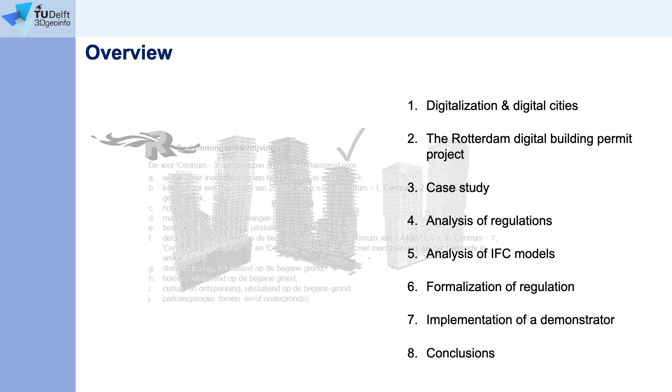The background of this work is the digitalization process, which is ongoing all over the world, with the aims of improving efficiency, improving the quality of services and cities, reusing the data effectively, enabling advanced analysis, and saving time and money. In particular, for building permit, several initiatives and pilots are developed in the world.

Some of the closer ones are the EuroSDR GeoBIM project involving several European countries, the European Network for Digital Building Permit, born specifically for this aim, and the European Directive on Public Procurement, ruling the adoption of digital technology for building permit. In the city of Rotterdam, a digital city pilot is running as well, within which this project was funded.

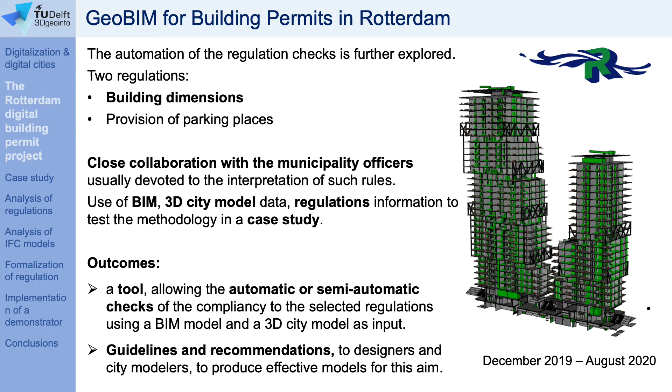The aim of the project was the development of a methodology and a tool able to support the municipality in the check of some regulations, namely building dimensions, which is the object of this presentation, and the provision of parking places. The biggest challenge of the project was the use of data as produced by practice and the actual municipality regulations, for which a close collaboration with the municipality officers was planned.

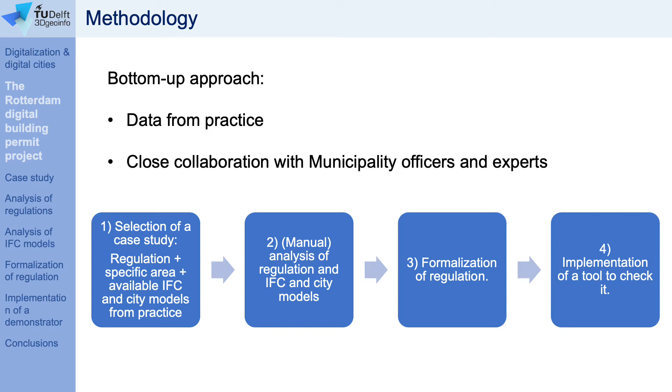The use methodology adopted a bottom up approach. After the selection of a case study, including regulation, area, and data, we analyzed all the involved components, formalized the regulation, and implemented a tool consequently.

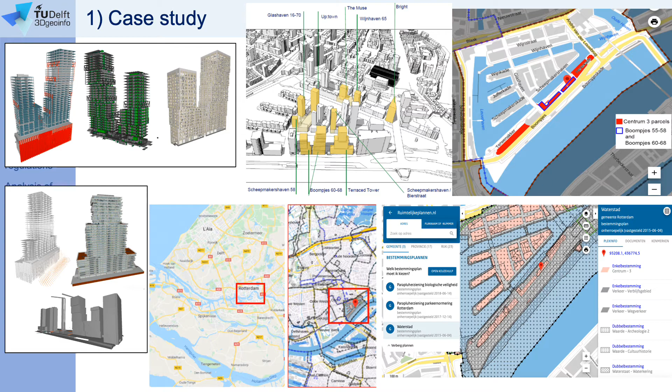The case study was in the Maritime District in the center of Rotterdam. The dimension regulation was considered for two buildings planned in the area. The IFC models produced by the architects of these two buildings were available for the project.

When reading the regulation in order to formalize it, many ambiguities and uncertainties can be detected, and several doubts had to be solved by the municipality experts in order to just understand how to interpret it correctly, even without the additional challenge of making them machine readable.

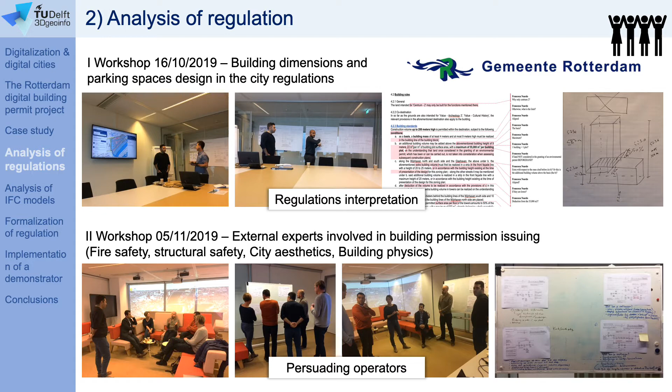To help in this process, two workshops were organized by the municipality in order to have the opportunity of easily interacting with the involved experts and having all our questions solved and answered.

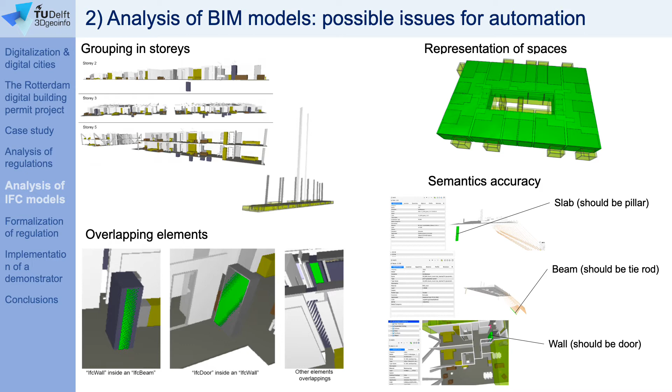Besides analyzing the regulation, we inspected the provided IFC models and we could notice some issues that could prevent some automatic processing. It is important to consider them when designing the tool and maybe trying to fix these at least in future through the guidelines to modelers that we will provide.

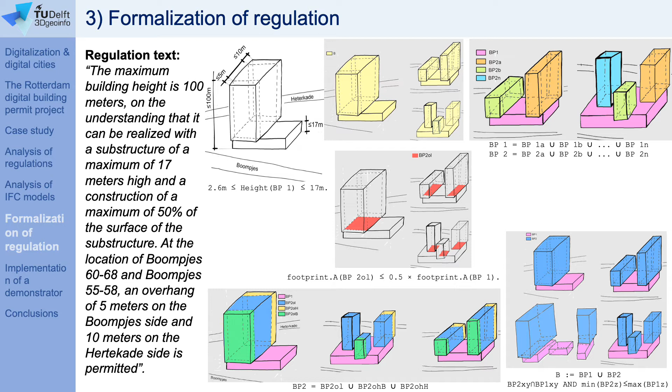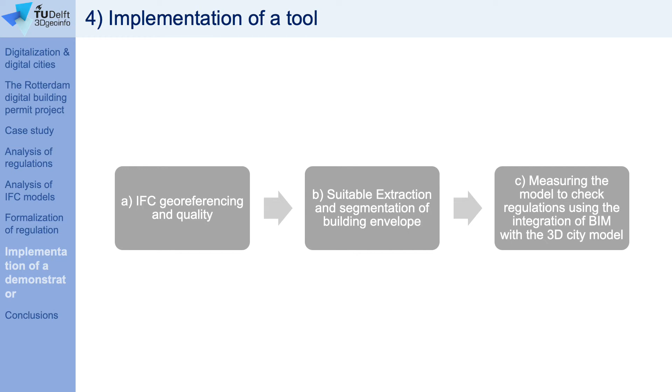After that, the regulation was translated to a formal language, enabling the conversion to machine-readable rules in the next steps. And the last steps consider the implementation of the tool and the use of it with the available data for checking the regulations and make the useful measurements that are necessary to make the checks.

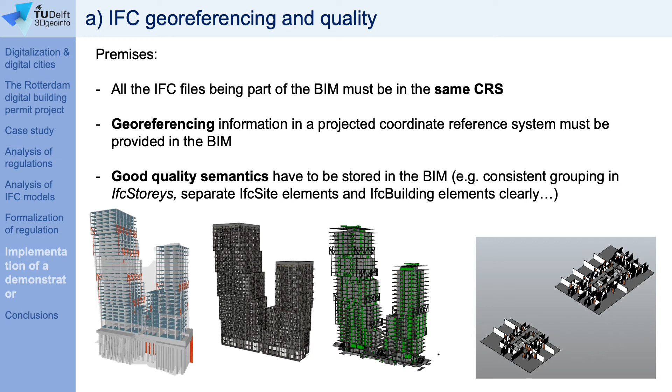A fundamental premise is the good quality and the georeferencing of the IFC models, for which we provided some guidelines. And then, essential to check the dimension regulations is the extraction of a suitable and useful building envelope, segmented consistently with what would be decided by a human mind interpreting the building drawings.

according to the traditional workflow, which is now ongoing in the municipalities. It is therefore necessary to detect the facade discontinuities and decide which ones represent an actual discontinuity and which ones are just a neglectable facade articulation. This decision is not straightforward as it appears in the picture on the right. A minimum dimension or difference percentage should be chosen to identify the building discontinuities.

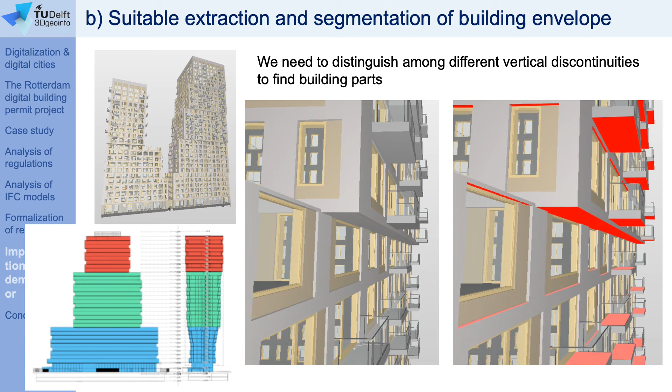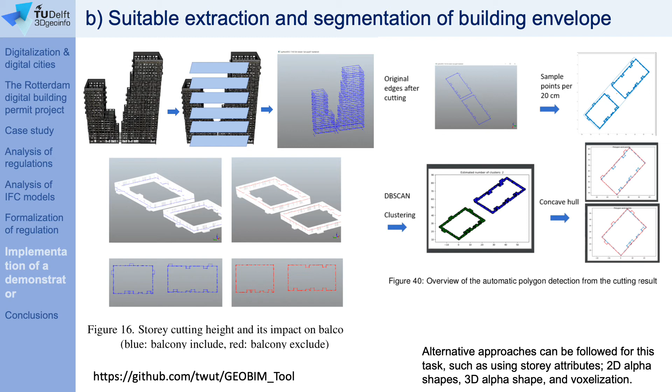This slide summarizes how the tool that we developed solved this issue by cutting the building in slices at a useful height first, and later the footprint of each floor was used to calculate the reciprocal overlappings, and the threshold to overlapping percentage was chosen to identify where the building could be properly segmented.

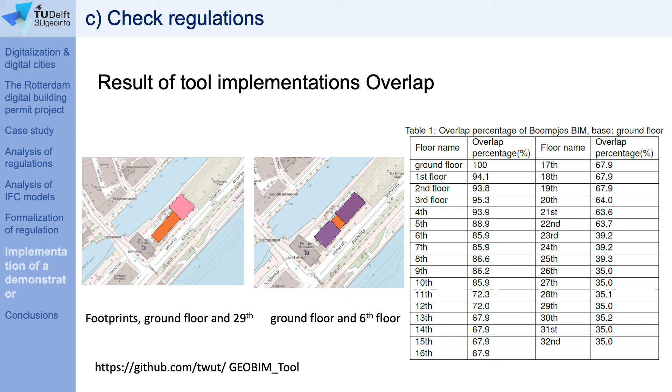In the next steps, specifically for this check, a stricter connection to the city model will be useful and will be implemented to automatically detect which is the side towards which streets of the building.

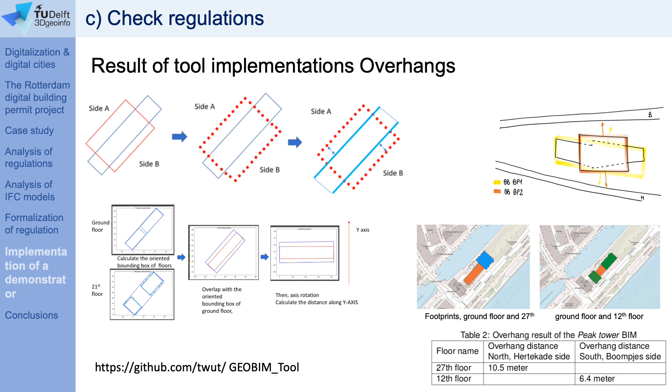To conclude, the adopted bottom-up approach was essential to explicate the several sub-issues which are involved in such a complex processing. This implied a slower start, but the definition of the problems and the articulation of them in the necessary processes brings a great advantage to the development of further steps and improvements to the initial demonstrator that was now implemented.

The GeoBIM integration was for the moment only partial, since many challenges arose in the initial phases regarding only the IFC file, but it will be critical in the next developments.

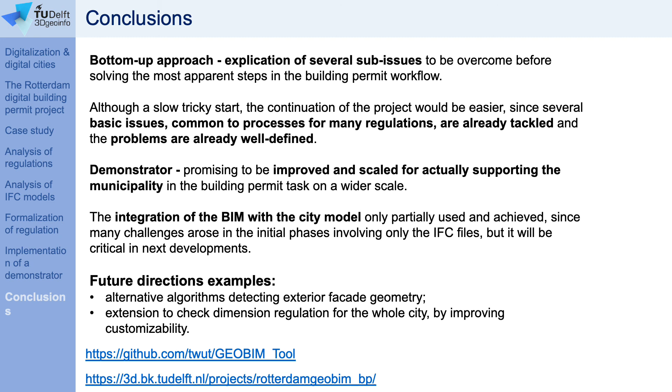The possible future work is huge, but these are two likely next steps: the test of alternative algorithms to detect the exterior facade geometry, and the extension of this tool to the whole city and not just to one only area.

You can find more information in the website of the project or in the GitHub repository where the open source tool is stored. And thank you for your attention.